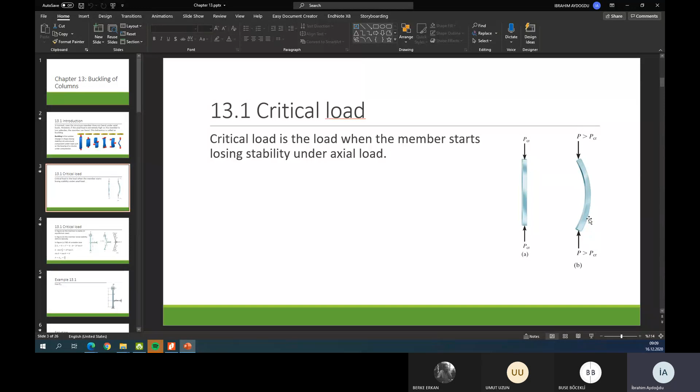But buckling cannot suddenly occur when compression force occurs, because there is some kind of limit force. If our force exceeds the limit force, buckling can occur. But if our force is less than the limit force, buckling does not occur. First of all, we try to find this load - the name of this load is the critical load. Critical load is, you can easily understand my expression, when the members start losing stability - that critical point we call the critical load. If our load is greater than the critical load, our structural member could lose stability and buckling can start.

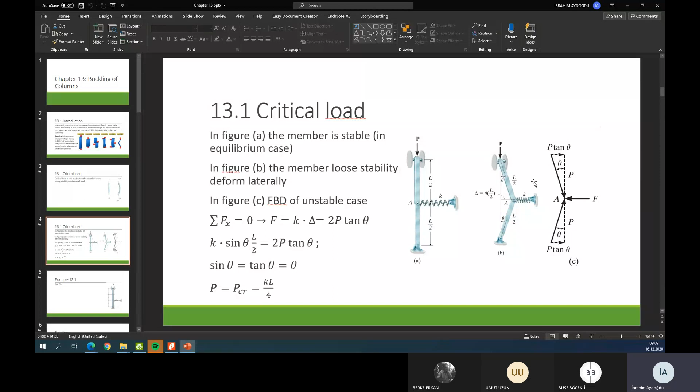I don't want to go into detail because I remember I gave an offline video on how we can compute the critical load in this case. Maybe I can just say one sentence for this: we will use equilibrium of the structure, nothing more. Just using equilibrium, this is a typical small example of how we can compute the critical load. I also solved one example and the solution is available here.

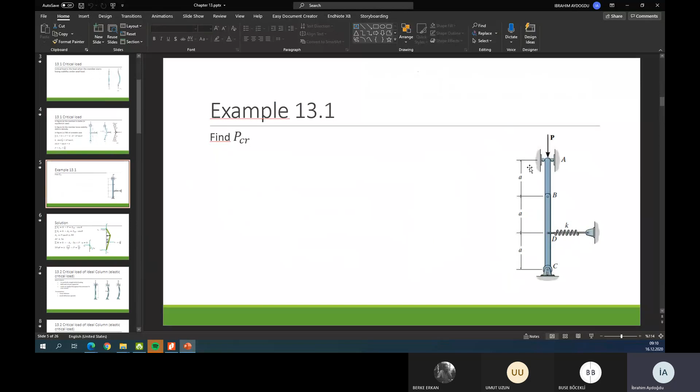Also, an important term is the buckling critical load of the ideal column. In practical cases, we don't face structural shapes like these - mostly we face structural shapes like those in frames and trusses, where we're dealing with a perfectly straight shape. There are no springs on some part of this shape, no additional things on this kind of structure. Therefore, this computation of the critical load of the ideal column is extremely important for me.

First, I want to talk about the assumptions. We assume linear behavior, and we neglect large deflection. Did I explain what small deflection means before, in previous chapters or lessons? I don't think so - or large deflection theory, P-delta effect? I don't think so, you mentioned it before. Yeah okay, you remember that. So I don't want to go into detail.

Also, for this ideal column definition, we assume both ends are pinned ends. Also, it's perfectly straight, and there is no eccentricity - in other words, P passes through the centroid of the cross section of this structural member. So I don't want to go into detail on this.

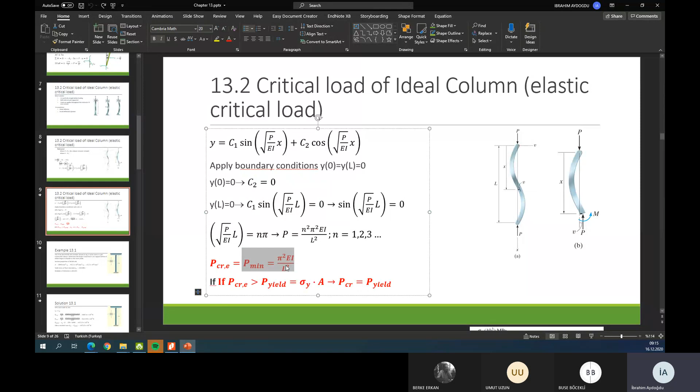This is not complicated, but when people see many formulations and mathematical operators, they can get afraid of these things. But when you come to the end, the formulation is simple. You are not responsible for the proof, but I want to tell you how we can obtain it, because this is extremely important. Therefore I give the proof in our offline videos and slides. But in the exam or elsewhere, you are only responsible for the formulation.

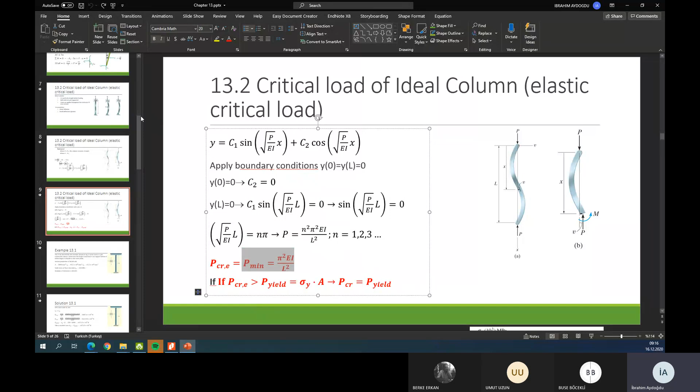Maybe you are wondering, this is the ideal column with a pin connection. If we have a different connection type, will the formulation change or not? Definitely it will change. But in that case we use the general case. In general, remember the ideal column is pi square E I over L square.

We put the K term near L, so K times L square. K is the effective length factor. The effective length factor changes with respect to the boundary condition, in other words the end condition. If we have different support types, the K term will change.

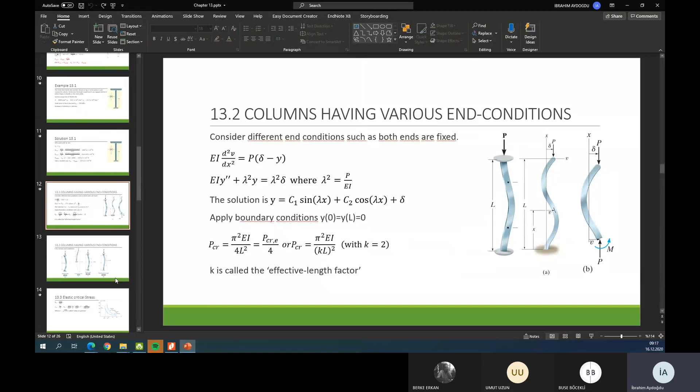We also have a similar illustration. For example, if both ends are pinned, like the ideal column, K is equal to 1. If one end is fixed and the other end is free, K equals 2. If both ends are fixed, K becomes 0.5. If one end is pinned and one end fixed, K becomes 0.7.

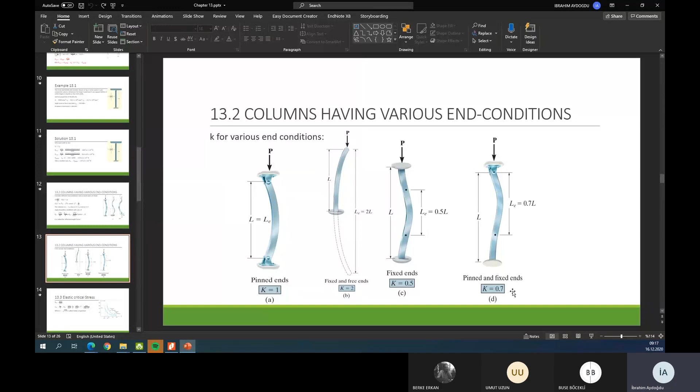This is the online exam material; anyone can find and look at these figures to obtain K values. Also, as I said, if we calculate P critical, we can also compute sigma critical, in other words the critical stress value.

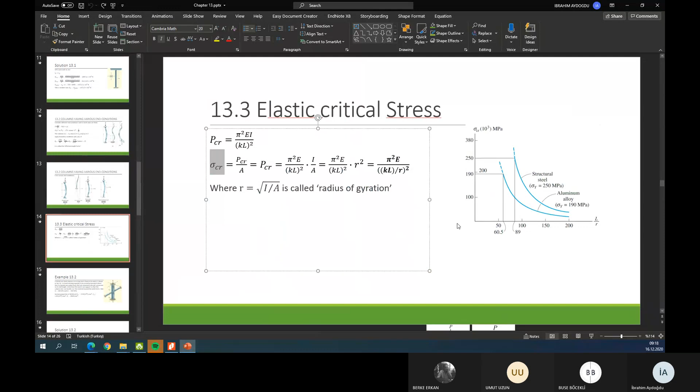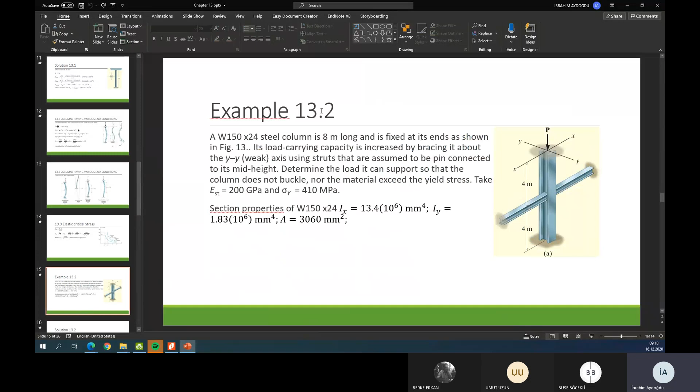I think the solution is available in the offline slides. The solution of example 13.2 is so important, therefore please look at the solution of this example too. This example is also important. Please look at the formulation.

I also want to solve one extra example for chapter 13.1, a different example from this one. I think it comes soon, okay, very well.

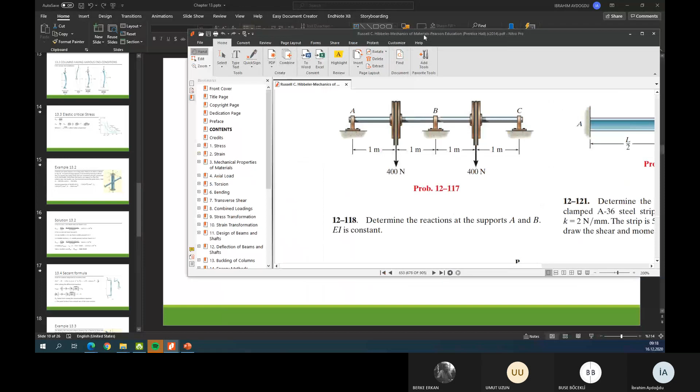Oh, this is coming from the previous chapter. Fundamental problems, you will choose. I saw a similar question in the exam like two years ago, I remember that. I saw a similar question again in the exam, or maybe in the homework.

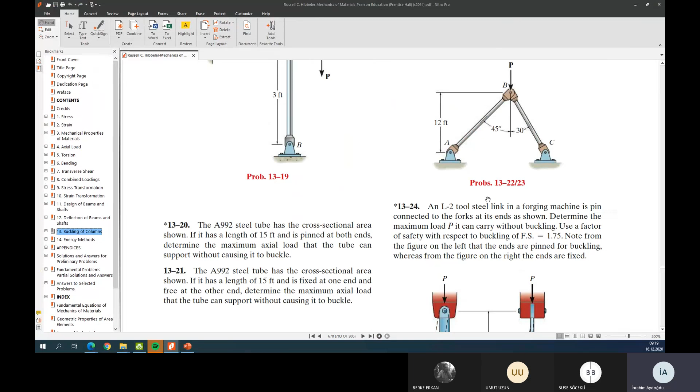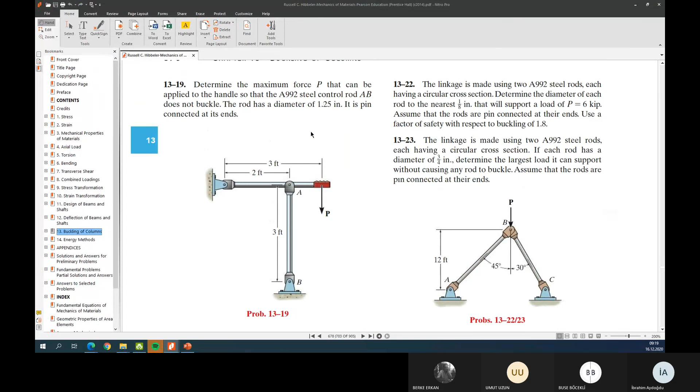I can't remember, I couldn't solve it because these values in this example use the British standards. Therefore I missed that question. British, this is good.

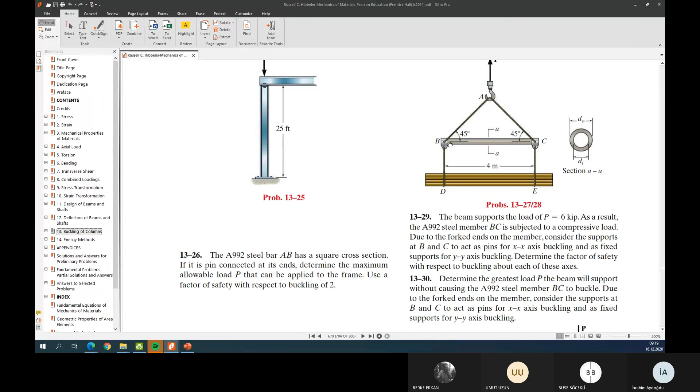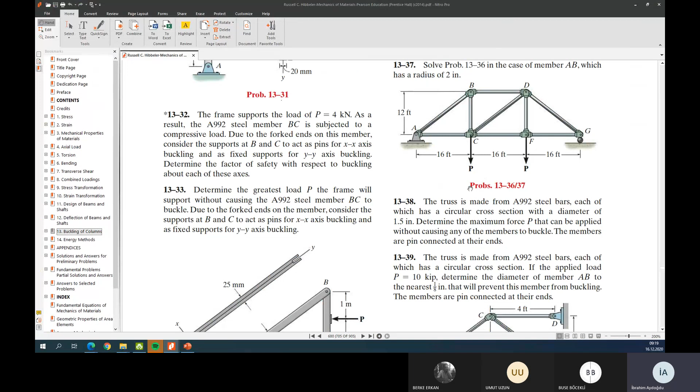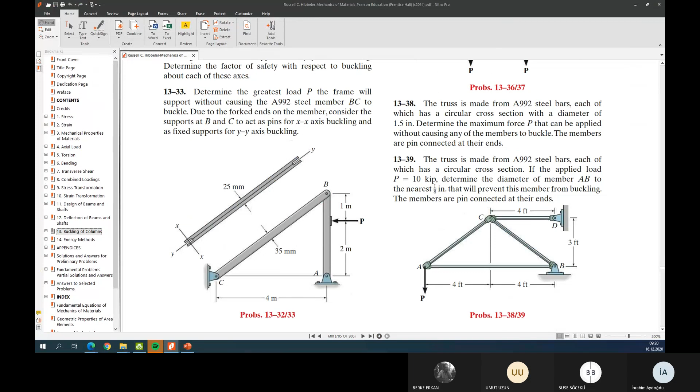1328, one option. And this one, skip this one. 1331, the second option. Where is this one? Yeah, this one too. 1333, which one do you prefer? 33, 31, and 28. You will choose. I will try to solve one of them.

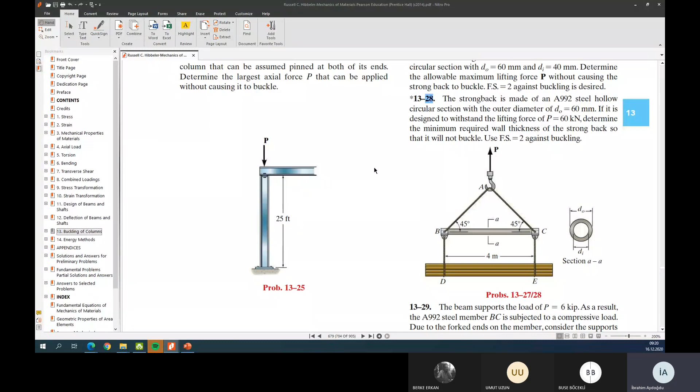I think it is an extremely hard question for you. 31? Yeah, 31. Okay, ladies first. Therefore, we choose 31.

I hope all the values are numerical. Let me read the question. The steel bar AB has a rectangular cross section, and A and B are pin connected. Pin ends determine the maximum allowable intensity W, in other words the distributed load that can be applied to BC without causing AB to buckle. Use a factor of safety of 1.5.

Factor of safety means that load divided by capacity should be... capacity divided by load should be 1.5. Did you hear about the term factor of safety in other courses?

Our machine elements course, yeah. This is typical, we can use any type of design using the factor of safety. If you started from steel design, machine design, and other design types, you heard about this. Let's start writing that. What is our strategy?

There it is. So first of all, I want to redraw it like this shape. There's my black color, and we have a distributed force here.

And here is the pin support, therefore I have two reactions here. So also here is the pin support in here, I can write CY, CX. We don't need to calculate this, but I'm writing this part.

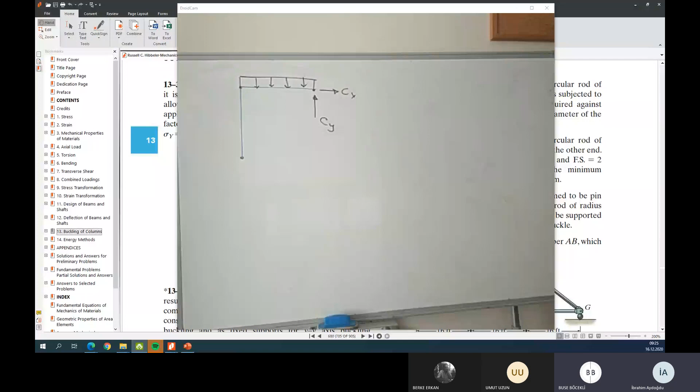Again, we can see the board? Sorry, Buse, I can draw, but for myself. Now you can see, this is the shape, but it does not seem to be an exact free-body diagram. Do you understand this one? Yeah, okay, is it enough to explain our solving?

Unfortunately, I need to cut our structure from this point. If we cut at this point, you can see both ends are pin. In other words, when both ends are pin, this bar can resist only axial load because it acts like a truss member. There's no shear and no moment occurring in this element because point A and point B are pin.

Maybe you can remember this from the statics course. Do you remember? If you don't remember, I can remind you.

Therefore, if I cut this system, I have two systems. I can take the first part, which is the beam part. The second part is the column part. Do you understand this definition? If you don't understand, you can ask questions.

I cut the system from point B. When you cut this system, I have first of all one element, the column element, and the column element can resist only axial load because this element is a truss element. Therefore there's only a vertical force exposed, this P, so 1 unknown, 2 unknown, 3 unknown.

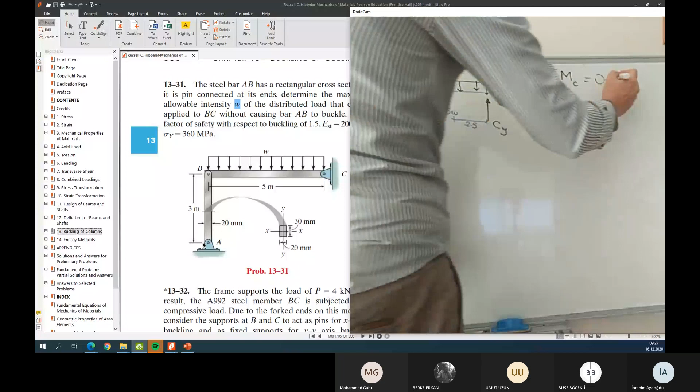And minus, because this rotates clockwise, I'm sorry, this is minus now, this rotates clockwise direction, this rotates counterclockwise. 5w times 2.5, what is the value? 12.5, isn't it? 5 times 2 is 10, half of that... 12.5w equals 0.

Then, I'm sorry, it should be positive. So P is equal to 2.5w. Okay? So this value is equal to 2.5w, 2.5w.

Do you have any question up to now? No question.

So my column, like this shape, the first value is 2.5w. This value should be lower than P critical. So first of all, I want to compute P critical.

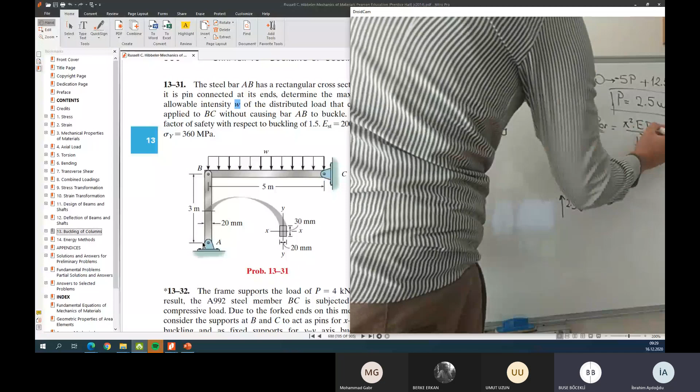So L is given as 3 meters. We know this. Also the modulus of elasticity is given. Where is this one? 200 gigapascal or megapascal. I can't see it completely. I think 200, yes, 200 gigapascal. Okay, sorry, I need to be a little bit more like this. So the only thing we don't know is

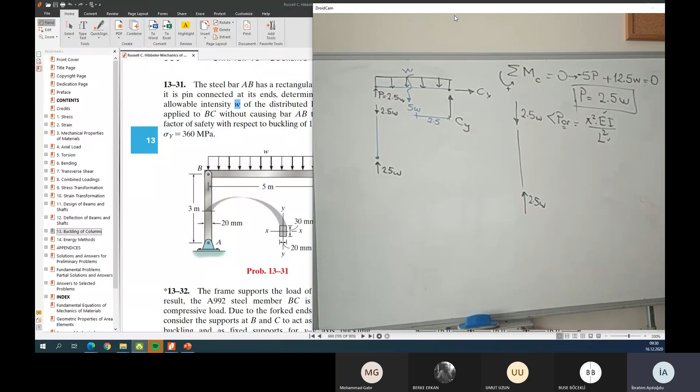the moment of inertia. How can we compute the moment of inertia? We have a cross section. So we have, sorry, 20 millimeter and 30.

So we can compute, this is, for example, the X direction, this is the Y direction. So we can compute Ix, Iy. So I write the formulation: I is equal to Ix or Iy.

Which one? Do you have any idea? Just take a guess, say something. Ix or Iy? Okay, no one wants to respond.

Okay, I is equal to the minimum of Ix, Iy. You understand? Because the system can buckle at the weakness point.

Just I want to show.

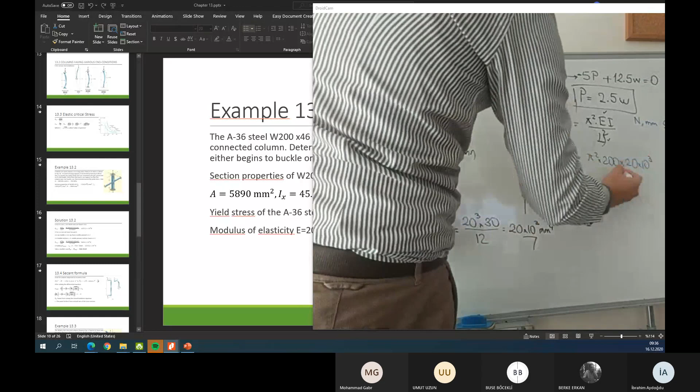Okay, let's try to write the values. I am working in Newton millimeter terms. Therefore, Newton divided by millimeter squared is... do you remember? Newton divided by millimeter squared is megapascal. So pi squared times 200 times 20 times 10 to the power 3 divided by L, L is 3 meters.

So I write 3,000 squared. Okay, after that I found that... calculated. Take me a few seconds to compute.

pi square times 200 times 20 times 10 power 3, divided by 3000 square. Hopefully it is correct. Yes.

This equals, sorry, that's gigapascal, not Newton millimeters. Newton divided by millimeter square is megapascal. Newton meter square is Pascal, kilonewton meter square is kilopascal, Newton millimeter square is megapascal, kilonewton millimeter square is gigapascal.

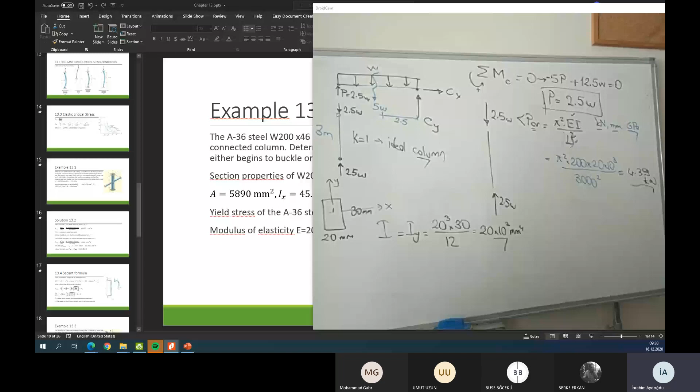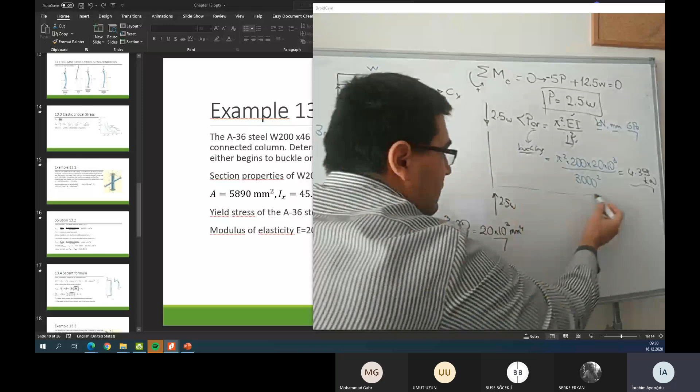So this value is enough or not in our example, unfortunately, because this is from the buckling. Also I want to consider this term. We are considering this, and remember, I want to open this slide. In the column design, we not only consider buckling, we also have to consider the compression case. In compression case, we have to measure the critical yielding stress.

Maybe you remember that from chapter 2 or 3. I can't remember the exact chapter. Do you remember the compression check? Maybe we did it in chapter 11. Okay, so it is easy.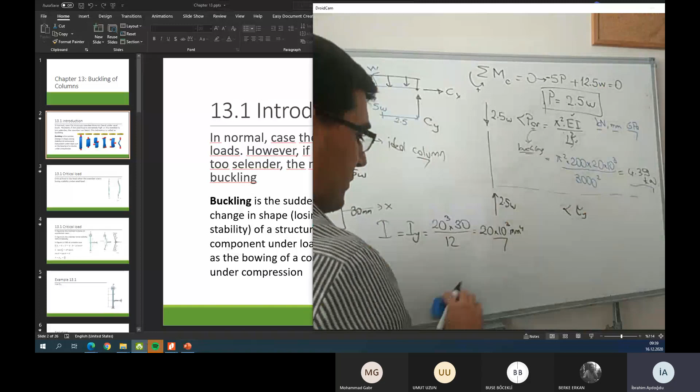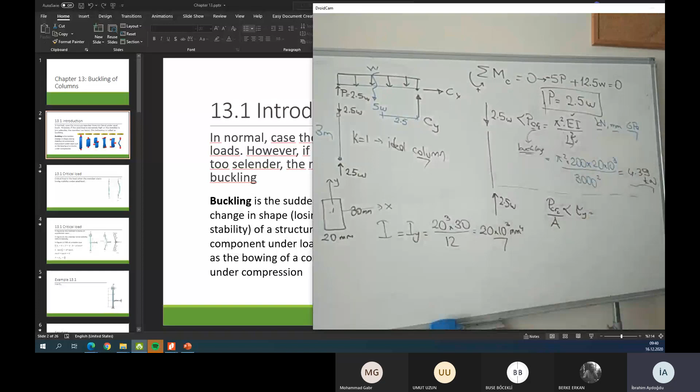In stress over than sigma yielding case, stress in compression equals P, this is the P critical one, divided by area, equal to yield stress. Yield stress equals a value, I need to open the example again.

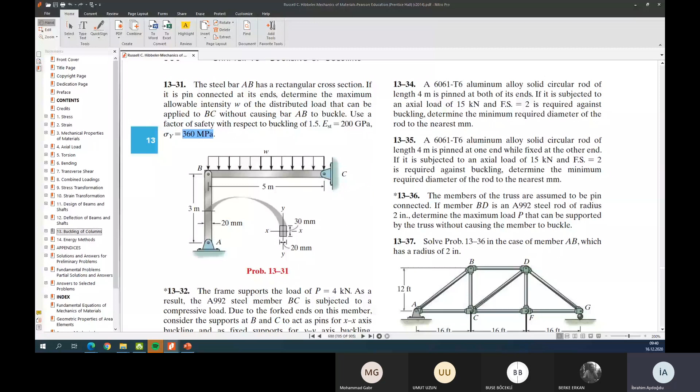This is in megapascal. Can I convert to gigapascal? I think I need to convert. So I write 0.36 gigapascal. Area is, we have a cross section, 20 times 30.

So our second P critical equals 0.36 times 20 times 30. This equals... you can see, P critical 2 equals 216 kilo.

So I have two critical forces. Which one do you think I need to take, the first one or second one, P critical 1 or P critical 2? I think the first one. Remember, the first one, because this is smaller, isn't it? Yes, I should take the smallest one. The smallest one is this one.

Therefore, P critical is the minimum of P critical 1 and 2, and therefore P critical is 4.39. Okay, can I erase this part? I want to continue here, like this.

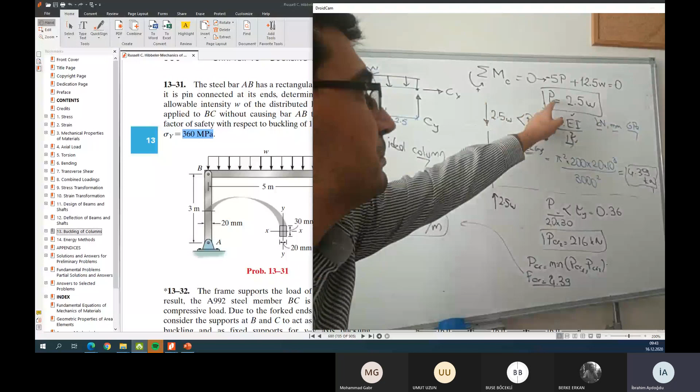Maybe you ask, hocam, in here we are using millimeter, why are we using meter here? You remember that when completing the relationship between P and w, I use the metric units, therefore I have to write the metric units. But when completing P critical, I use millimeter. If you're confused, you can use millimeter here, or meter here. Which one do you prefer? It's up to you.

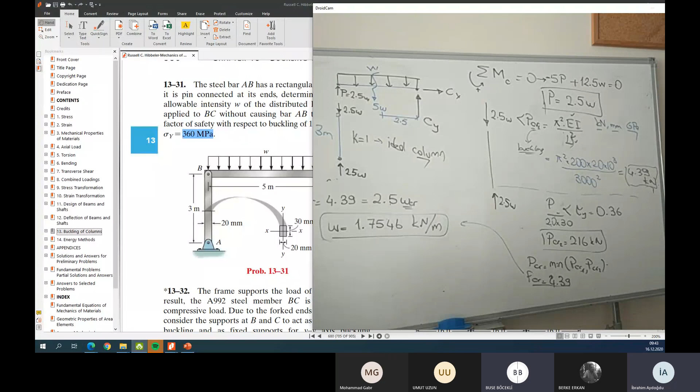Do you understand? Do you have any question? No question, no question, okay.

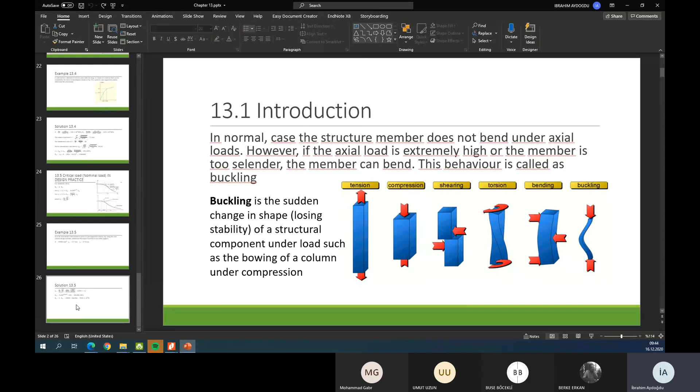I solved many examples in chapter 13. I remember more than 5 or 10, I think 5 examples. Additionally, I solved one example here. I think this example is enough for this week. Next week I am planning to solve one more example for chapter 13.

Then we will pass to our last chapter, chapter 14. If you have no question, we can finish our course.

Muhammed, Buse, Berka, Berke, Umut, do you have any question? No question. Thank you, sir. I have no question, so thank you.